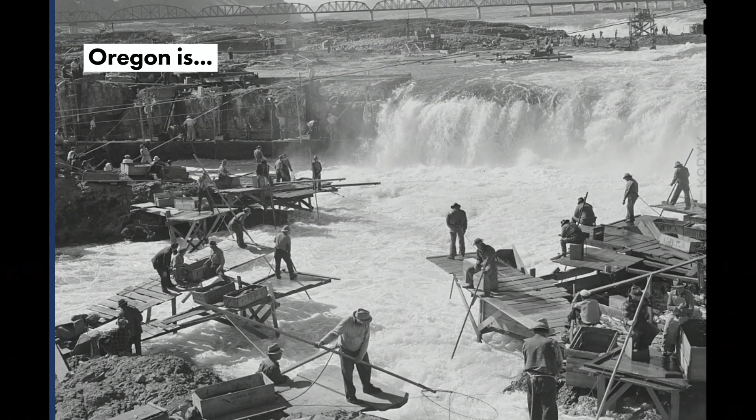It also has a long history of being rooted along its river. The Columbia River drains half the United States, it seems like. It's the second largest river in the United States, and has always had a relationship to that river. This is Celilo Falls, near Mount Hood, where for thousands of years the native populations would fish, and in the '50s they dammed it and they lost this.

But this image and this iconography is still very important to people in Oregon, but especially to emphasize that it's also this: Intel is the largest employer in Portland. They have huge multi-billion dollar fab shops there, just outside of Portland. So it's high tech plus rural economies plus extraction economies, both things simultaneously—we rely on each other.

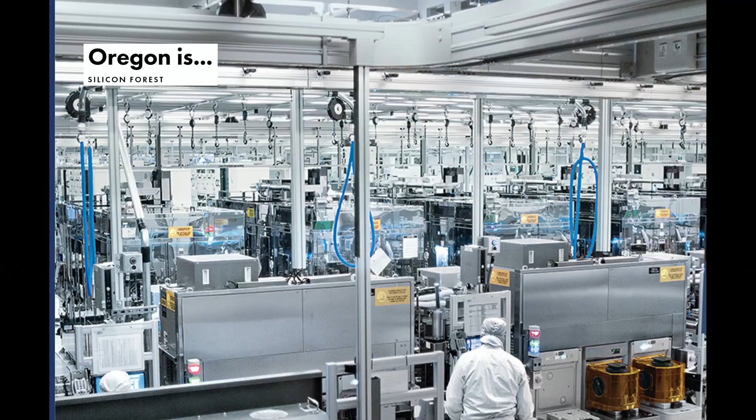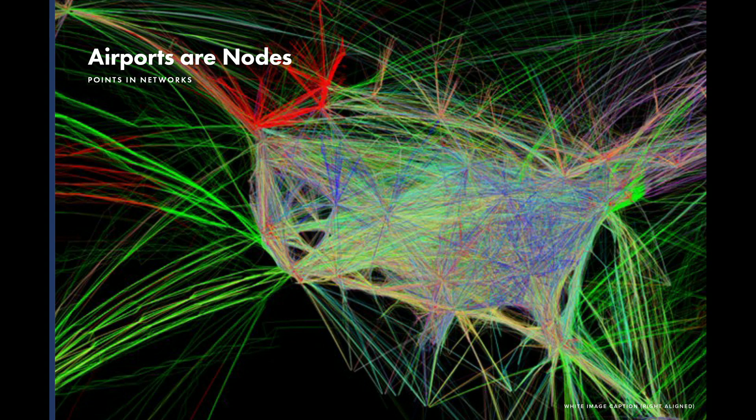Now, this project that I'm talking about today is airports. Airports are, first, nodes. There isn't a line from Portland to Indianapolis, but you get the point—airports are nodes. First, they are just nodes on networks. And as nodes on networks, they could be extremely anonymous. They could be just a connection, and that's all they need to do sometimes.

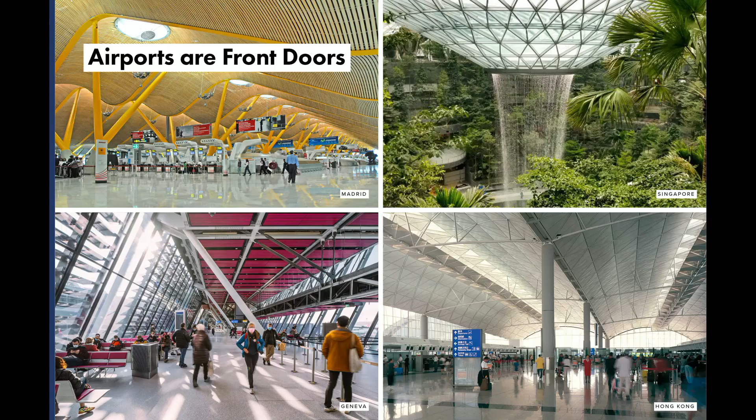They're sometimes front doors. Here you see some of the most iconic front doors in the world. You see Madrid on the top left, Singapore on the top right, Geneva, which I visited last year—astonishing, like space—on the bottom left, and Hong Kong, which kind of set a new standard for what an airport could be, on the bottom right.

All very different, all a little bit more specific to the places they are. That's something we were very interested in—there's some rules when you're doing an airport, things you need to do, but there's also a lot of freedom. So it's the freedom to express the place that we drove at with this project.

Like how do you get at defining a front door? And in defining that front door, how can you bring industries into a mega project? Because like building a cathedral, a mega project brings opportunities to do something radical—to lift up, in a cathedral's case, 15% of the economy of an entire region, which brings with it workers.

Expertise to accomplish that mega project. We also had the opportunity to do something radical when we did the airport, to think differently about how you do the job of architecture, how you do construction differently.

First, I want to talk quickly about ZGF. ZGF is based out of Portland, started in Portland—that's kind of the origin story. We started working in the region, doing primarily institutional work: hospitals, city halls, the public side of the city. Eventually we got into transportation, light rail, developing the light rail lines in Portland, then expanded along the West Coast, first to LA, then Seattle, then more recently Vancouver, and then opened up shop in DC. In DC we've been very involved in embassy work and larger projects—Amazon, for example, Amazon's headquarters two was done by ZGF—and especially research projects.

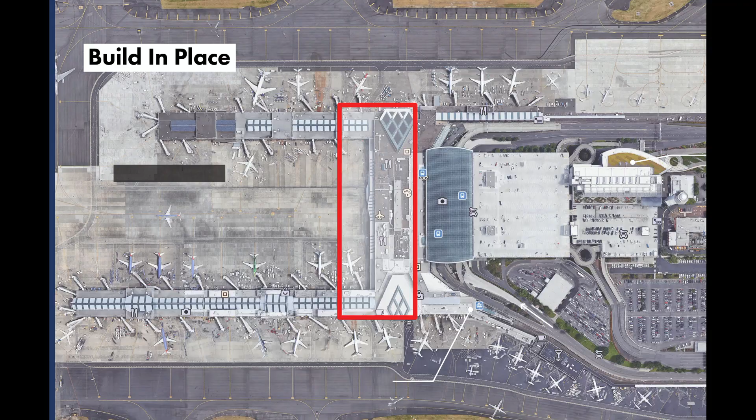Just to get some background, this is what the project is. It's an airport, and we've got to replace the thing in red there, the terminal, like the heart. We're working on the heart, we're doing open heart surgery. An airport can't shut down, so you've got to stay open.

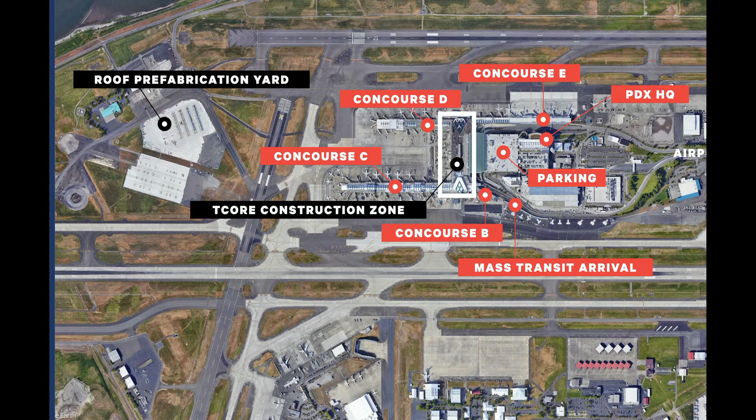More context: an airport involves concourses, it involves a terminal, it involves a central utility plant, but also it's got space around it. We'll get to that thing on the left later, but space around it became important in this project. So the ask of us was, hey, like many large pieces of infrastructure in this country, we've got a problem.

We're running out of space, we've got nowhere to grow. We've heard about this big earthquake that's coming. We're burning all kinds of fossil fuel. But we've got to basically double our passenger capacity, get to 35 million by 2045. We've got to do all that, grow in place. We've got to set up a new structural system which allows us more flexibility, because with technologies coming in, especially biometrics, it changes how people move through airports. Queuing is changing, the space needs are changing. We've got to do all that, but still save what's good about Portland, save our heart, what is giving us our identity. And by the way, we want you to double the operational footprint of this thing in capacity, but can you also cut the energy use in half? Figure out a way to do that.

And also come in on budget, but include as much of the local industry as you can in this thing. We want you to maximize, let's say hundreds of contracts to local people, not just a few, but really push this. And then no planes can be turned away while you do it, everybody's got to make their flight.

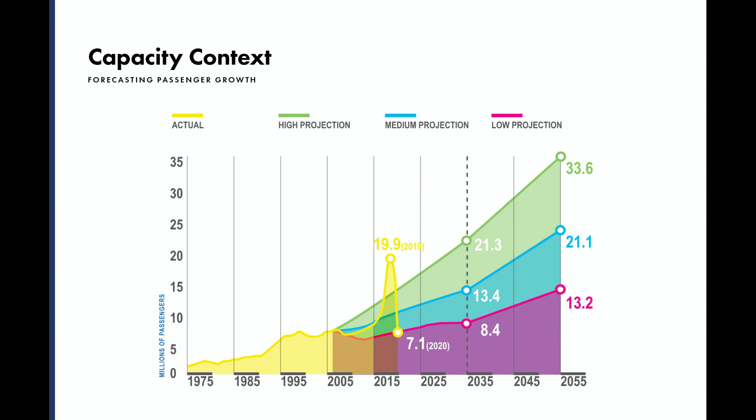And that means that, like most of the Pacific Rim, we've got volcanoes and earthquakes in Oregon. We just haven't been hit real hard recently.

But there was this article that made the front page, a huge article in the New Yorker about five years ago, by a geologist at Oregon State University who said he was doing tree cores in the Puget Sound, and finding that there was this regular period of earthquakes going back 10,000 years, evidenced in trees that got submerged.

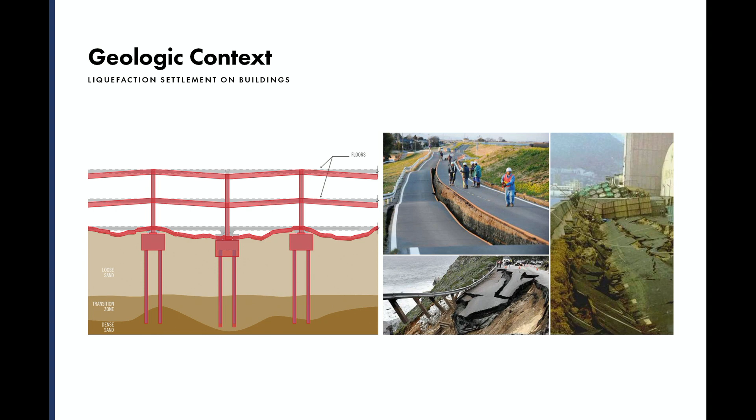And this is what it means: when there's a major earthquake, especially building along the Columbia River, you will get liquefaction. Liquefaction means your foundations will tend to settle, and when they settle, you get catastrophic collapse. The way you design for this is with piles, the vertical elements underneath the foundations, driven very deep. Our project addressed this by setting up a foundation that could withstand liquefaction, driving those piles deep enough to get below the soils that would move.

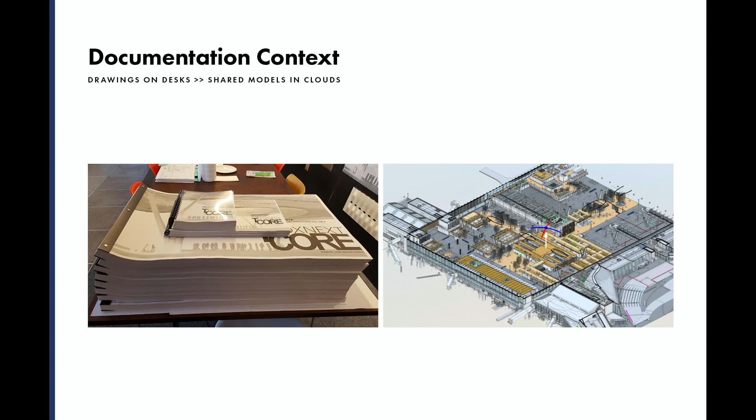The other context I want to bring up is documentation. The thing on the left is a contract document—a set of drawings, a 3,000 sheet set, the largest ever done in Oregon. The thing on the right is a model, which I saw on the screens as I walked around. The interesting thing is we now operate in the world of the model, and the model means collaboration. There are 250 models that are federated together, meaning you're working with the people building the buildings simultaneously as you design, so everyone's included, designing things virtually together. That has radically changed how we collaborate as teams.

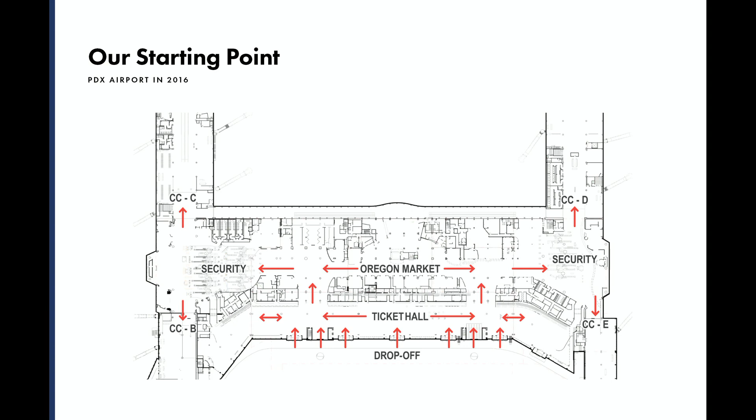So here, I want to get into the plan a bit. At the airport, you get dropped off—this is the existing building before we got into it. There's a ticket hall, common retail space, then you split north-south through security, and you're off to your airplanes.

That was built on top of many buildings that grew over time, like many pieces of infrastructure—12 buildings ultimately, stitched together, each with their own structural problems, their own collapse problems, their own architectures and identities. Our mission was to create something new out of that.

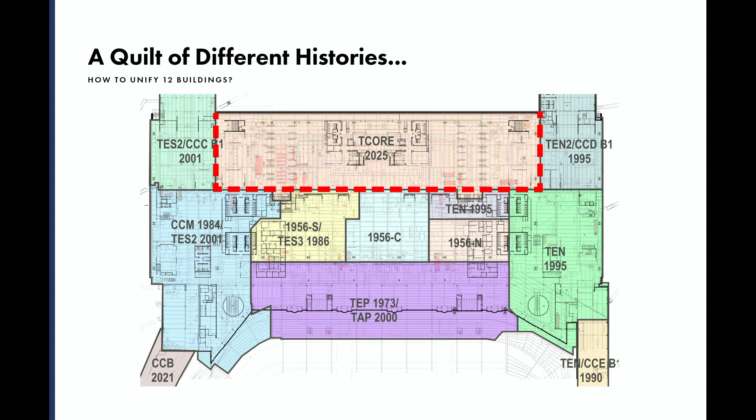Those structures are represented here, and the blue is actually the baggage handling system. When you go to the airport, the baggage handling system is below you—you often don't see it, but it's doing a lot of the work, kind of the nerves of the building. When you build over this thing, you can't really touch much of it. You have to come in lightly and surgically work your way through all this stuff.

So what we started to think, stepping back with our new plan, is how do you operate on a new scale when you've taken 12 buildings and created one space? What do you start with? We started with an idea about thresholds—because at an airport, you get your ticket, go to security, concessions, and then to the concourse.

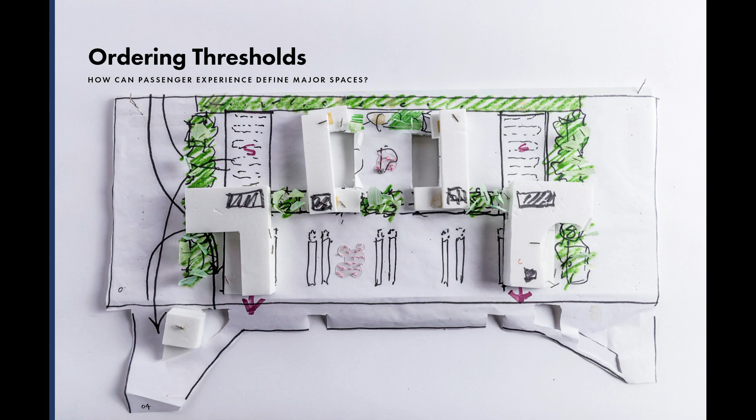Thresholds of space, thresholds of stress, thresholds of different kinds of processing—using landscape and materials as a way to make something of those thresholds, so there's a more intuitive way to move through the space, not just relying on signage. This drawing has no structure, no roof, no floor, but shows how we create moments in the plan which help define the important big spaces in the project.

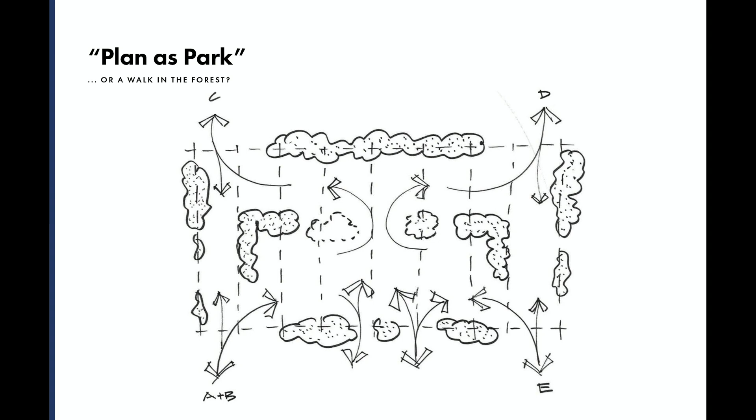And we wound up with this: you come in, there's ticketing, but it's flipped around. Then you get this moment of wood floor and landscape, then a market where people can get together, then security north, security south, and then you pop out and get your shoes back on under trees.

You've got some concession spaces, then you're off to your Alaska Airlines flight, Delta flight, or United flight on this side. It's set up using materials and landscape especially, and crafted elements to create big spaces. So it's like setting up a very big volume with small interventions of buildings, landscape, and materials to help people understand where to go.

Because oftentimes airports can be confusing, right? So we wanted to make it real straightforward—ideally you don't need signage.

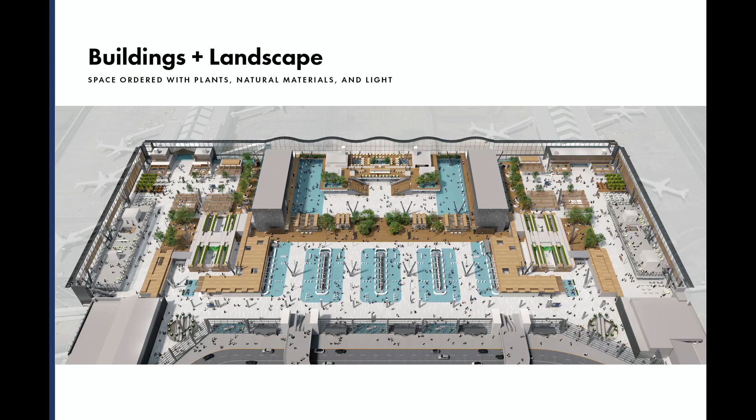And these are those big rooms—it's like a big volume. This is a 9-acre space, 1,000 feet by 400 feet or so, organizing principally around these spaces: a ticket hall, a market, and a security area where the queue can flex, growing into this space or stretching out of it depending on the holiday season, say.

Then you leave into the concessions area, and if you arrive into Portland, you come down these concourses and pop out into this kind of landscape element, then down to get your bags and leave. So the idea is it's hopefully super straightforward, and it just makes sense when you're there, without needing a lot of articulation at the scale of graphics or signage.

And then this is the kind of setup here, which starts to introduce the idea of this roof and its sizing. Now, as I mentioned, we could only come down a few spots—what does it mean to do that? Well, it means you've got to come up with the right spans for structure to thread through that existing building.

In our case, we traveled around the world and looked at what it takes to set up a ticket hall—it takes about 100 feet. Imagine your ticket agents: you're checking in your bag, you're waiting, you have a queuing area, and then you have circulation areas between this, which gets you moving through the ticket hall.

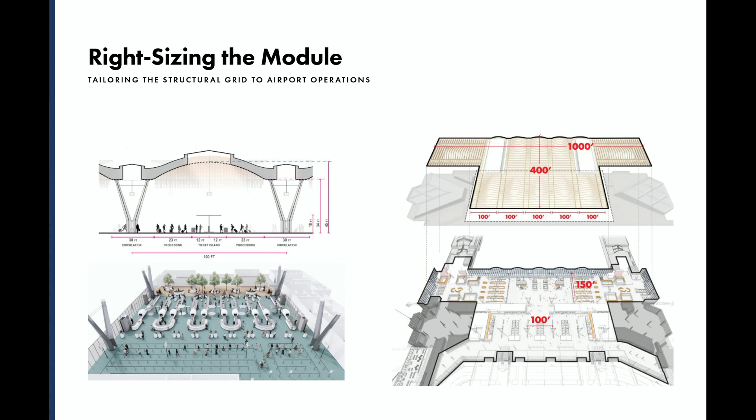The other scale is 150 feet, which allows us to stack security lanes with no columns, so the TSA—because they're always changing how they set up these things—has flexibility to grow as they change technologies. This space is meant to be totally flexible, so they can introduce biometric technologies to help you pass through quicker.

And that sets up an idea of a grid to overlay over this new building. But first I want to talk quickly about the structure—that was the structural interventions—and then there's the systems. How do you also get at the carbon question here, growing but also reducing the energy footprint of this building? Here's the summary slide of that: we focused on the primary systems of the building, which is the central utility plant.

We focused on creating a high performance envelope to take down the cooling loads of the project. We focused on the roof—it's a big roof—so how do we maximize daylight underneath this big thing? And how do we basically allow you to operate this little airport without turning lights on if you really needed to?

So we came up with the idea of a series of different kinds of skylights. And then materials, bringing in those local materials, bringing in the low VOC materials, bringing in a lot of things that people would actually want to be around as they're occupying the space.

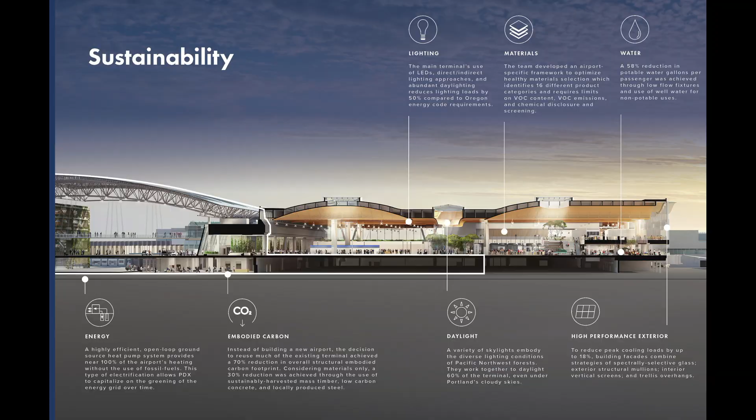What we did is basically kept this building from the late 50s, this old central utility plant, stripped out the boilers and replaced them with heat exchange units. An airport's got a lot of land, there's places to drill geothermal wells, so we had injection wells as an open loop system, injection wells and extraction wells, which we connected to that central utility plant, and then used that steam piping that had been steam, converted it to low temperature water, right? Just used the same system that was already there, just by converting to heat exchangers in their existing central utility plant.

Well, you'll ask, what happens when you build this thing? We're doing it in a very schedule-specific way, right? We're headed towards summer right now, so cooling is still important. But we're setting it up so that the switchover in terms of the systems is very quick, and we can do it. It's this really smart little game that our mechanical engineer came up with - to use what they have and backfeed the existing distribution systems, which takes us to this, which is our EUI.

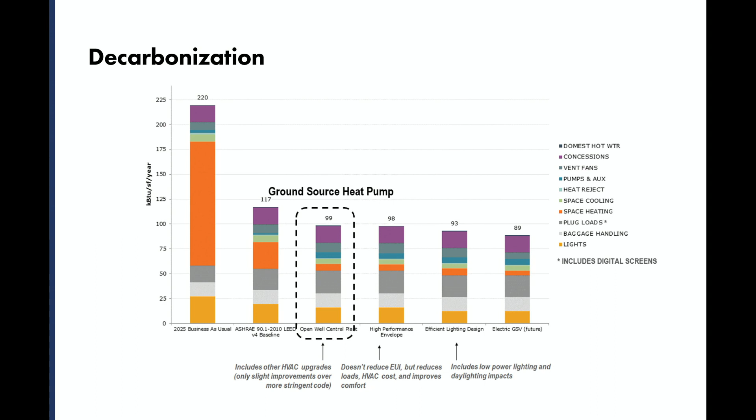This is an energy use intensity, which is like BTU per square foot. It's a metric for how energy intensive your building is, right? And we were able to, with geothermal, drive under 100, and then work our way from 100 down to 89-ish as we electrify more things, with a high performance envelope, with a very efficient lighting strategy - just pick at it until it gets to 89, which is really good for an airport.

And then there's the embodied carbon side of this thing, which I'll get to a little more later, which is basically saying, well, concrete is obviously intensive. We need these foundations, but the piles are steel, and the steel - we can try to find recycled steel pipe to build a lot of those. The steel structure itself is also fairly intensive, but we can find local fabricators to reduce that footprint, which we did.

And then the wood is very helpful - there's a lot of wood in Oregon. But what if there was a way to really maximize the benefits of wood by being very specific about where it comes from? Because if we can bring the wood in from forests that are managed very responsibly, we actually get more benefit. So that's a little bit of what I'll get into here.

But first - construction management folks, shout out, come on! I want to share a little about how we built this thing, because to have a conversation about how you build it and what you build, for this project, that's the same conversation. You can't build this thing, you can't even imagine this thing without first and simultaneously thinking about how you build it.

Our mandate was to keep the building going. The planes had to keep going, right? The passengers, up to 20 million a year, had to make it to their flights, which means we had to build this thing in such a way that it couldn't get shut down, ever, right?

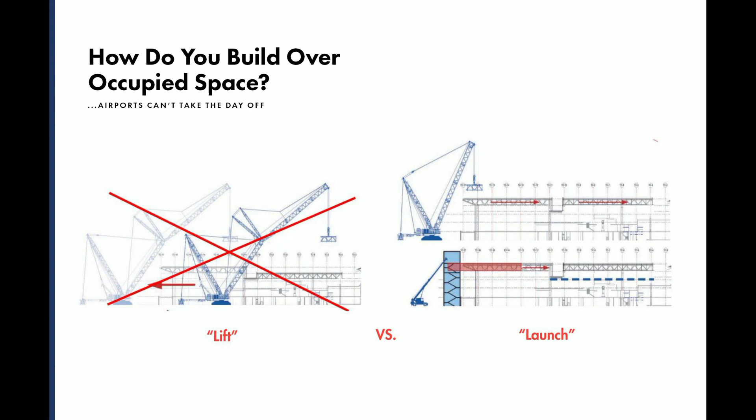There is no day off for an airport, right? And that meant we couldn't use big cranes to lift things into place, because that would mean you'd have to shut down these spaces down here, which have to stay open. So the Port of Portland required that if we were gonna build in place, we had to come up with a way to slide things over so that this stuff below can stay operational. And that changes how you think about it. It means that if you're sliding it into place, you're building it somewhere else and moving it over to the construction site and sliding it in place.

One of the illustrations we did early on was this. It was like, okay, what we need to think about is building a new column idea, where all the tops of these columns are at the same height, and this roof thing slides almost like rail cars into place. Which is what this illustrates, the idea of sliding things into place.

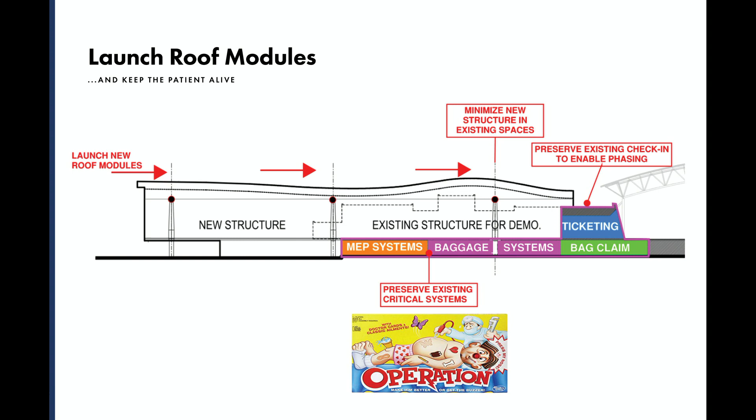So the next set of columns is there, outboard, and then way outboard. You have to keep things going as you slide the new over, and you can demo the non-essential - the retail spaces, offices - and that existing floor gets upgraded in construction.

So here's the diagram of what that is. You get these columns at the same elevation, and the new roof shares that same level so you can slide it into place over those columns, and these things are what we call modules, roof modules. And these are big - this dimension in this model, these are 150 feet apart, so the total length is close to 360, with big cantilevers on the end - this is actually a 65-foot cantilever. So these are big super modules, and then these modules can be very specific to the spaces below them. So that's what we do - come up with a very regular frame, but within the frame, very specific roof shapes and interventions that help frame the spaces below.

Very simple phasing, right, which the contractor loved. We initially had like 23, 24 phases to the project, and we reduced it basically to 2, because of this idea of the module, which is repeated - this is a repeated version of that, and that. And these things all get built off-site and then stitched together in a very specific way, which this diagram shows as a model of the modules coming together. We slide them into place over the existing building, from the airfield on this side.

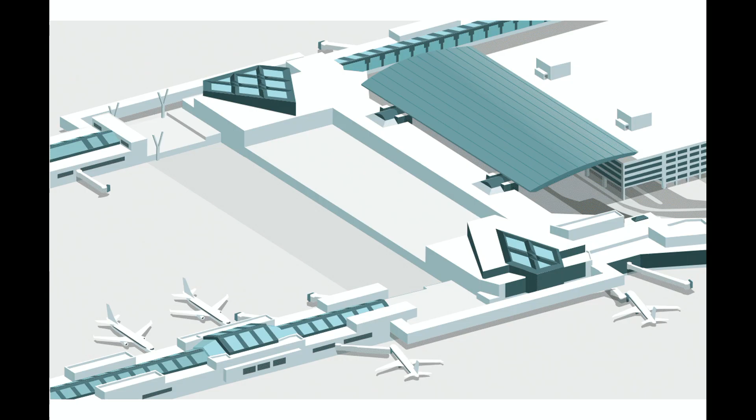And then this illustrates that kind of quick process here. So you get the columns getting dropped in, the roofs coming into place, first over the existing, and then off the two ends of the concourses, and this kind of mega machine moving them into place, which I'll share with you.

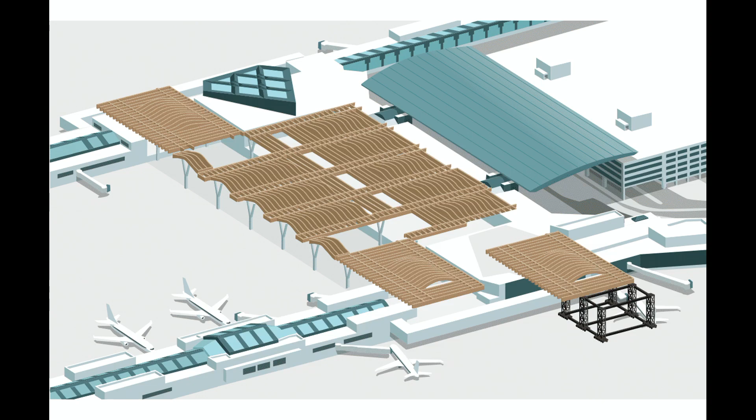Pretty unique. These are like 1.3 million pound mega modules that are built off-site and then slid into place to make this new building. And that off-site happened to be right down the airfield from the existing building. There's the main terminal there. This is where they got built, called Fab Yard, 1.2 million square foot Fab Yard, just to the west of the main tarmac and alleyway for the airport.

And this got built right away. So the first thing we did is build this. And the reason we did that is schedule compression. Because normally, you demo something, you get ready to build the new thing, you start building the new thing, you work your way from the bottom up. Here we went top down.

No, let's start with a roof. Let's get that going right now, because we can get it, we know what it is. Let's get it going right now. And that allowed the demo to happen at the same time, and that allowed people to move out of their offices and get ready for the new stuff at the same time. So it allowed normally the things that get stacked up to the beginning of the project to all happen at the same time, which reduced the amount of construction time tremendously and also helped with that whole budget pie chart thing.

And this is what a fab yard looks like. So the cool thing here is that when this is in place, this thing will be 60 to 75 feet in the air, and you imagine how hard that would be to work on. Well, in a fab yard, if it's prefab, it's 12 feet in the air, which is a pretty typical ceiling height. So you can get armies of people on these scissor lifts doing their work in a safe way, and they can talk to each other.

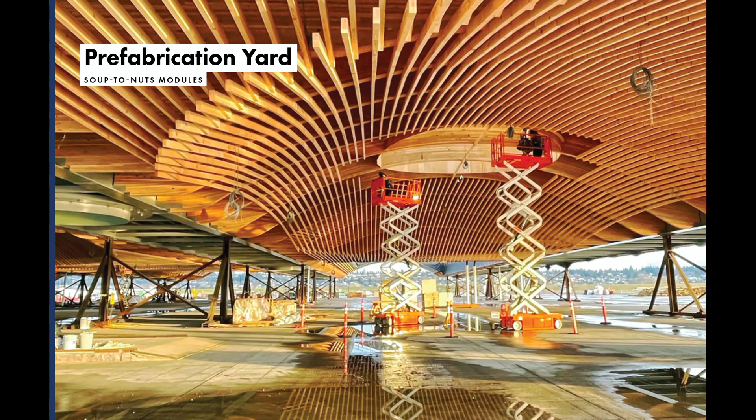Let's do this. And so here's an image of the fab yard a couple years ago, and here's from the inside looking up at that new roof getting built. And it was built in its entirety. So the roofing's on this thing, the structure's there, the acoustic baffles are in it, the fire protection system's in it, the lighting is in it.

So that when it's pulled out of that fab yard, we call it unzipping. When you unzip this thing, you have to build it all together, and then you have to design zippers to make sure you can pull it apart, because it's got to move its way over to the airport. It all goes together, and you don't want to go back up on that roof and reinstall something. You have to just get as much done as you can here, so that when you move it over to the airport, it's as done as possible.

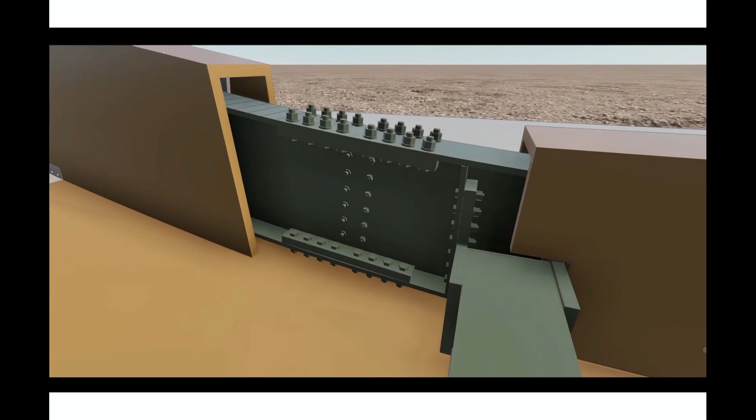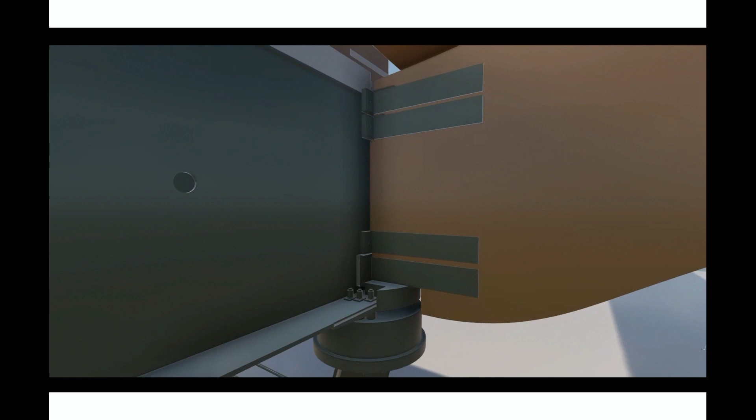And here's kind of an image of just a study that we did with a company in Canada designing the assembly process. Again, back to that construction thing, working on how do you design a zipper so you can unbolt the steel parts of the roof and slide things out and rebolt them together. So that's what this is, and you see some of those columns here. You see this is just one of the modules of the roof sliding out of place. But we did this to illustrate sequence, to illustrate to our contracting partners and the owner, the Port of Portland, how this could happen in a safe way, and how we can manage the risks associated with moving big things around.

And this is one of these modules, right? So it's a kit of parts, primarily girders, which are the kind of straight lines on the edges here. These are steel, basically bridges, built the same way as a bridge girder, steel bridge girder. Very simple and almost a commodity in terms of price.

Simple. And then it's wood. All the stuff going in this direction is wood, big wood beams that are all made in Oregon and have different geometries. We only have like 7 different arches, but we create loads of different shapes with just those 7 arches.

And then skylights, which are subtractions. So over the columns, there's a kind of round structural beam that actually became a skylight. Over the landscape elements, you get these big skylights. Over important moments in the plan, you get these smaller domes, almost like the Pantheon, say. And those all mark space.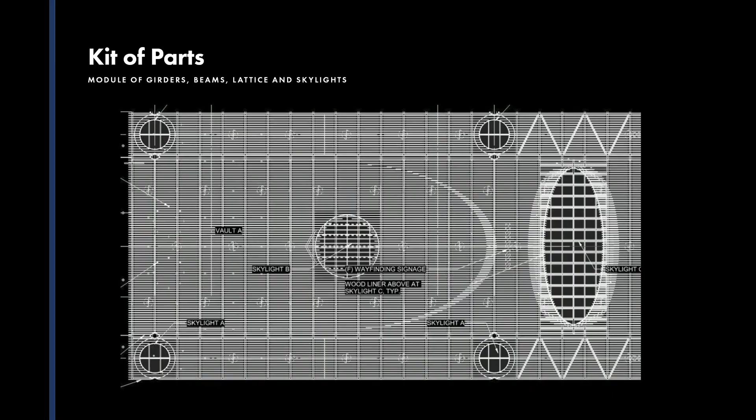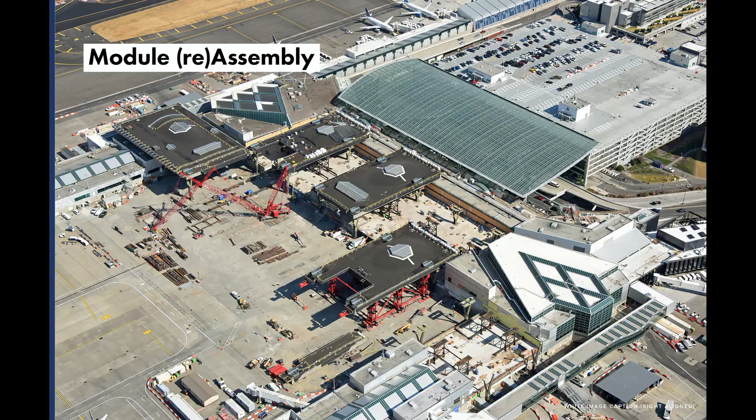So crews working on the module, getting the lattice installed out in the fab yard. There's the fab yard, and the roof is in its complete form. Here it's getting unzipped. A company from the Netherlands came over, and Houston came up and brought their equipment from Houston ultimately, but it's Mammoet. And they were the team that figured out how to move it, right?

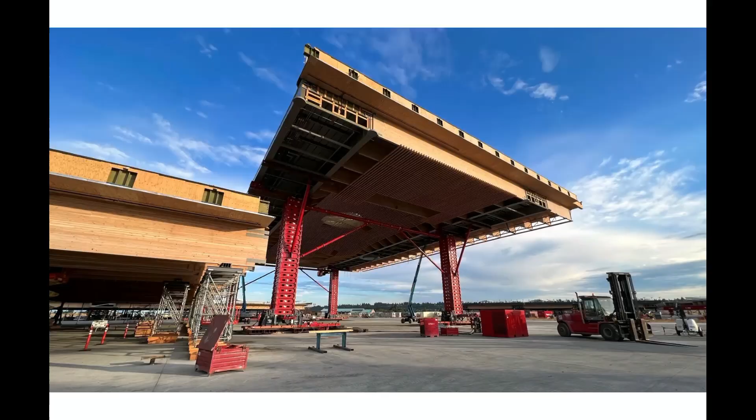And so they come up with these big steel elements that are basically jacks and robotic feet that move this thing to land on those columns. And so here you see it moving across the airfield at night. We got a 3-hour window between the last flight and the first flight. So think 12:30 a.m. to 3:30 a.m. kind of time frame to move this thing over.

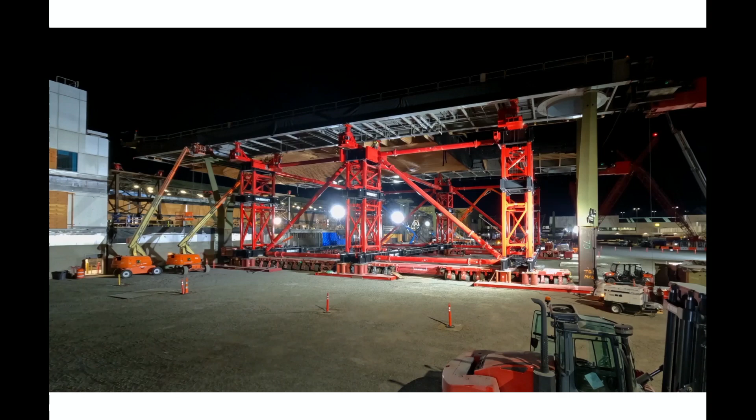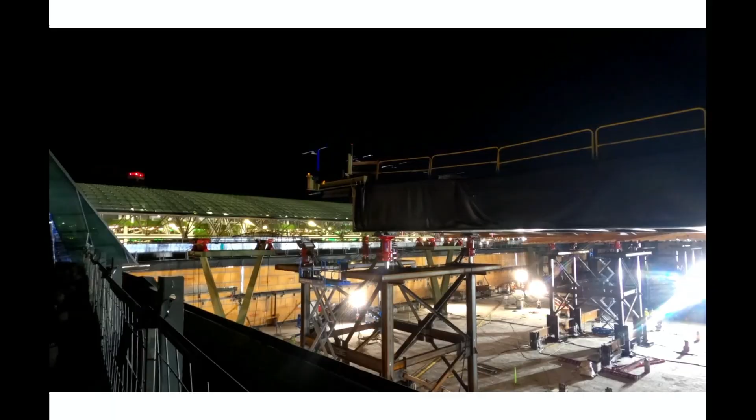And then when it lands, it lands on a column, and it'll get slid into place with what are called strand jacks that pull the roof across the columns, and allow it to very delicately work its way there - there's, as you might expect, a lot of grease involved here, lithium grease, to get it in place. But it allowed us to keep all of those baggage handling systems, all of the people getting passengers to and from their flights underneath this construction, keep them working, right? So that work can keep going while the roof is being slid into place over them.

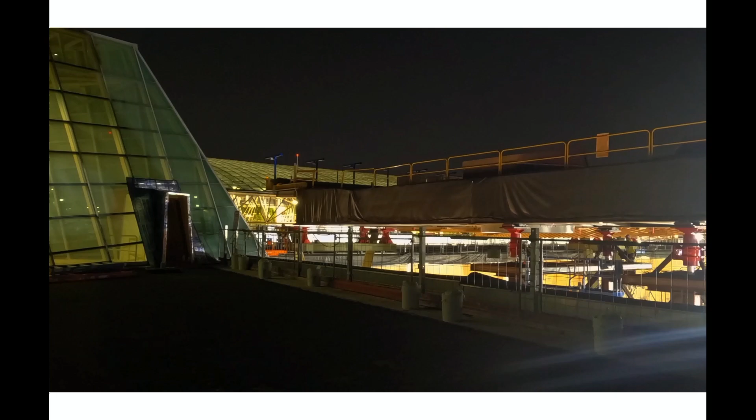And again, these are very big elements. I think the biggest one's about 200 feet by 100 feet, and 1.3 million pounds is the biggest one. But then they get kind of stitched together, where there's the primary girder, and then there's infill elements that slide between the two steel elements.

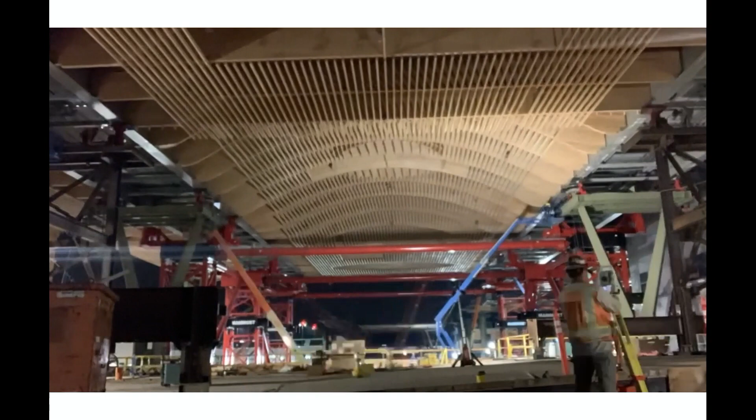So a really challenging construction problem that a very big team of very smart people - engineering, contractors, the owner, architects - everybody's working on this. How do you think through how to build something over an operating building that completely turns upside down how we think about our sequence through here, right?

And we explored, like you guys do here, a lot of models initially were spanning between columns, again long span structure, in a roof that allowed light in. That was a key thing for us. How do we set up a roof that allows light to get in?

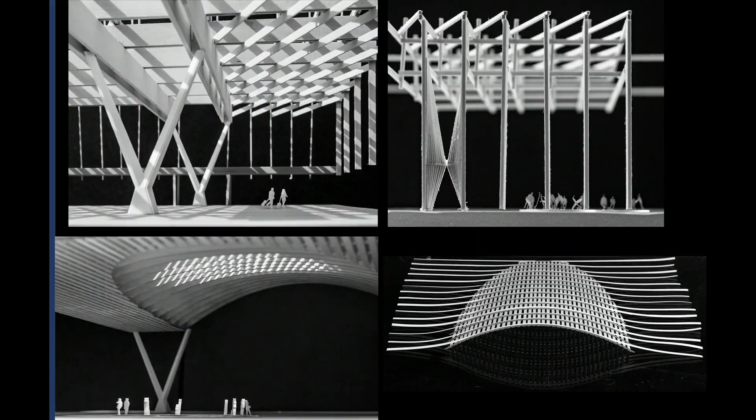These are early sketches the team did on the columns, which split the load of the beam in half right away, and give you a zone where steel runs all of your rainwater, sprinkler mains, and all of the mechanics of the roof.

Then you shape the vaults in between, and those vaults can have specific shapes tailored to the spaces beneath them. Under the ticket hall, they're domes. At the perimeter, they're vaults letting light in. And then other lights, skylights, between them.

So here's that kind of geometry—columns 100 feet apart, big glulam beams with lattice underneath, steel girders between the columns. This is a 100-foot span, and underneath, 38 feet in the air, you get other structures which are concession structures.

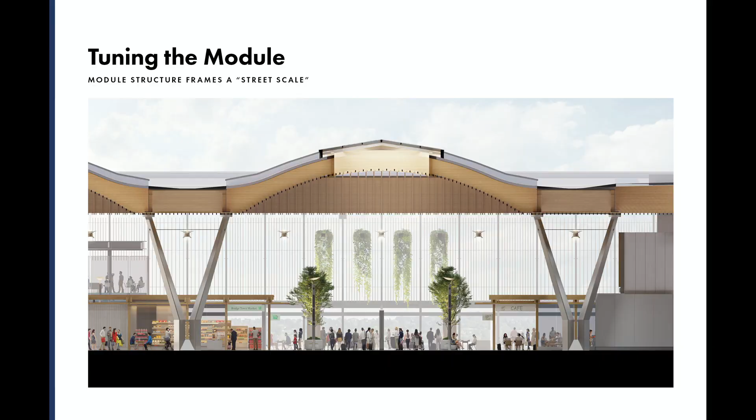Trees, light posts—so this starts to feel a lot like a street, and in fact it is, exactly dimensioned off of a very important Portland street, 23rd Avenue, our main retail street. The dimension between here and here matches exactly the dimensions on 23rd Avenue. So you get your coffee shop, your sidewalk dimension, and then your thoroughfare dimension. It's set up to be familiar to the streets of Portland in a very specific way.

The team was exploring what it means to get at that roof and get light in—models, we lived in models for years on this project. We had teams building fabulous models of this roof to explore specifically how light and how construction could be thought through.

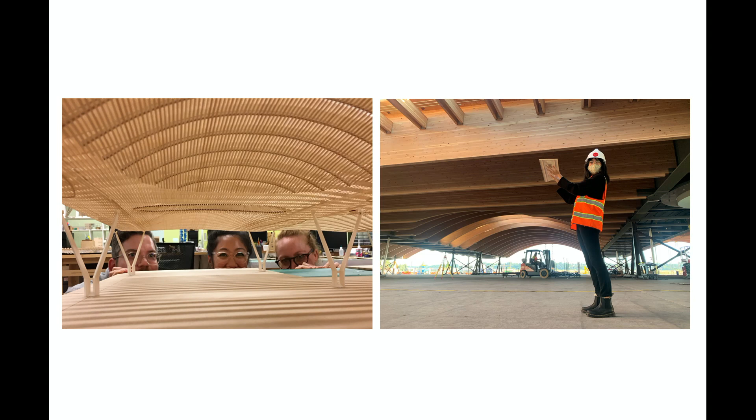Here's Talisa from our model shop going to the fab yard with the first model she made of one of these modules, kind of proof of concept—a really proud moment of contributing this thing to the thinking of how this could come together, even at that scale.

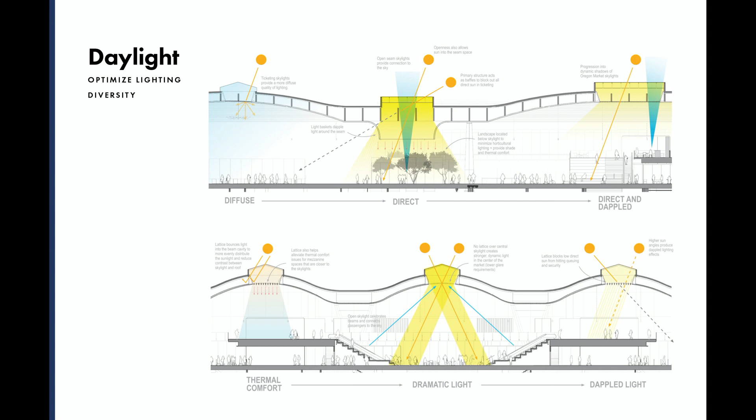And it's not just any light, it's all kinds of light—it has to have a variety of experience. Some of it's direct for landscaping elements, some of it's dappled light for different parts of the program, seating areas, restaurant space. Maybe dramatic light to punctuate different parts of the plan, direct sunlight on the floor. But mixing it up—sometimes it's controlled, sometimes it's not—done in a very distributed and careful way.

Skylights are expensive to maintain. You don't want too many, but they do a lot of work for you. So the question was, how much can we just rely on daylight for this whole airport?

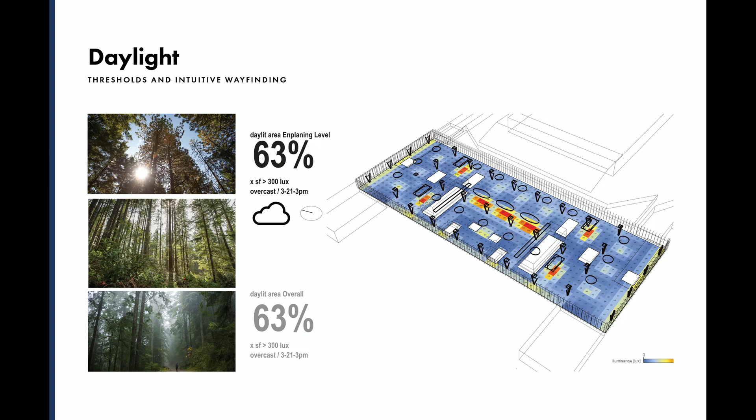We wound up with over 60% of the floor plate above 300 lux, which is fine to work and walk around in. So most of it is daylit, and some of that daylight is punctuated, shown in dark red. In fact, now the construction team, when you go there, isn't relying on lights—the roof's on, but they're just using the skylights to build the building.

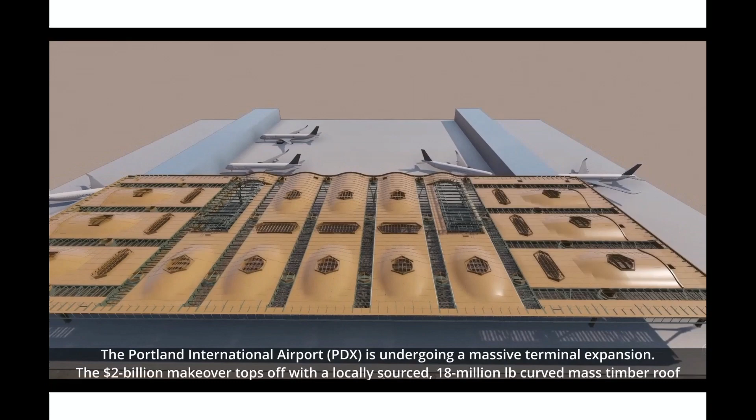This is a quick summary image—I'll skip over it since we've seen some of this—showing all those different skylight elements on the vaults, giving a sense of where they are. All the skylight elements were built out of mass plywood, like these little hexagon-shaped things, and then we put a fairly conventional skylight system over that.

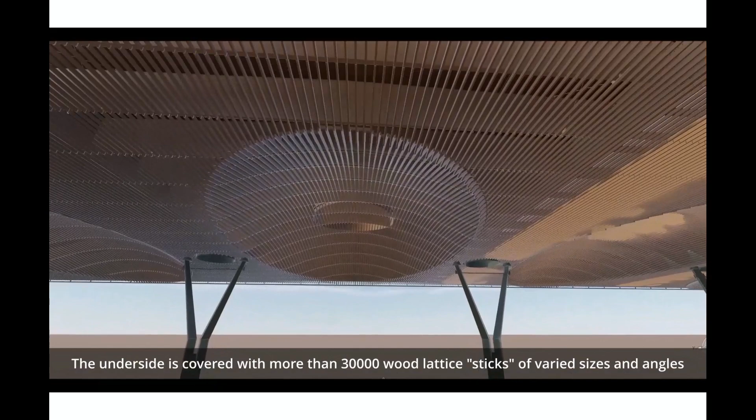These models are done not for the client, but actually to help the contracting team, the people building the building, understand how to build it. They can have conversations about sequence and getting people in and out of spaces.

These are those light baskets from below. Just last week part of my team was here visiting. You see these are 60 foot by like 20 foot skylight elements that bring light into the space.

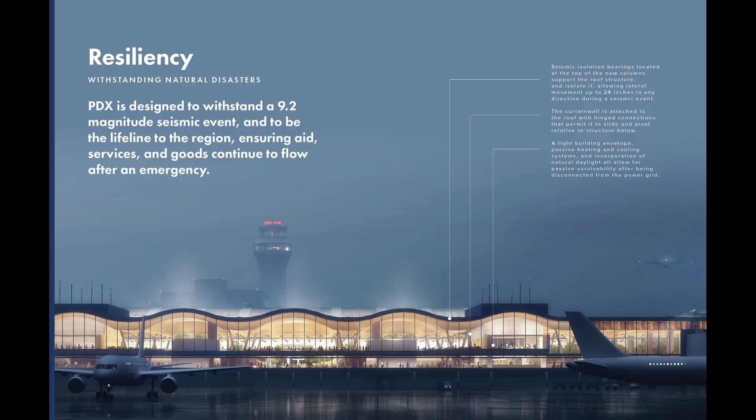And then the curtain wall. The curtain wall is part of this resilient system. A curtain wall hangs, right? Think of a curtain, curtains hang. The curtain wall hangs from the roof, not unlike a tablecloth.

So this was the concept for the curtain wall of the building. It's a big box, 1,000 by 400, but also includes many very specific edges. The key thing to appreciate is that big curtain wall has to move with a roof that's moving 44 inches, as Pam said - so 22 inches in every direction. That's a lot of movement. Nobody's ever done something like that in North America.

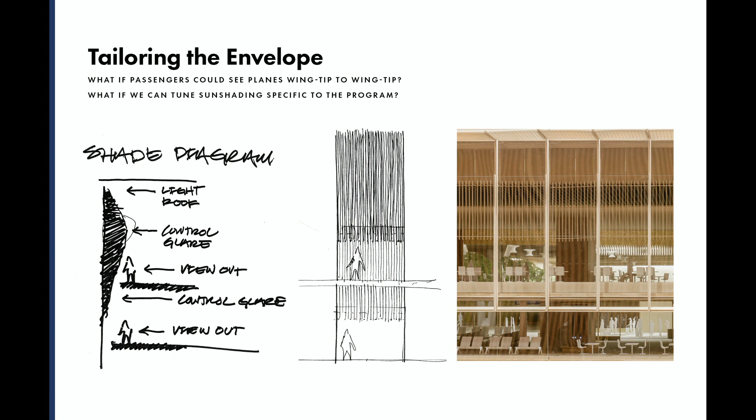And the curtain wall has to do things very specific for the occupants behind it. Some people like colder environments, some people like warmer environments. There's a diversity of experience that's important to support all along the perimeter. That diversity of experience was a layer we add to the curtain wall - kind of sun shading and glare control that hangs with the curtain wall.

We did a tremendous amount of analysis - if we're going to control glare and sunlight, where do we do it, and how much of it do we do it? We studied both visual comfort, how much sun is hitting the floor at specific areas around the perimeter, and also first cost, like how much we can reduce the cost of cooling for this project, since we're adding cost to the curtain wall.

We did it for every elevation, for the horizontal elements, below the vertical elements. In some areas you get fairly significant first cost reductions, 18% to the cooling load for this whole elevation, which has real dollar consequence. Some are less significant, but you balance them all.

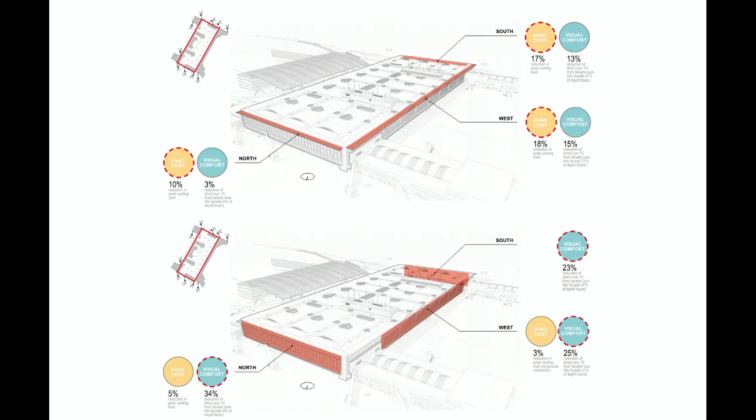To wind up with something like this, kind of a Swiss Army knife - we call it high performance, low profile. At the passenger level, down here low, it almost goes away. There's no mullions, it's just butt glass, jumbo glass, 10 foot by 14 foot tall, with no mullions. The goal was just to kind of deliver some magic.

So like you're a young kid, you go to the airport, you want to see airplanes. Airplanes are big things, hundreds of feet wide, and they're right in front of your face. So you want to see wingtip to wingtip - that experience of seeing the entire airplane as you approach the perimeter of the building.

As you move up and you see the clouds, and you need to control sun, the density of stuff increases, and so we get this kind of grill work up above. This is a section on the right of a curtain wall, and a diagram of it at a chunk of the building.

And here's what it looks like from inside - it should just be gone. You shouldn't see anything there. You should just see airplanes, you should see the hills of Portland beyond. It's not about the glass - you want it to just be gone.

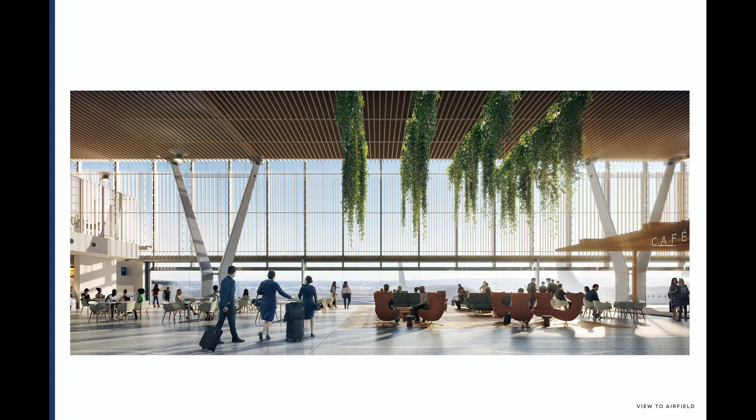But as you move up, it has work to do - it has to control some of that sun, so the stuff starts to show up. And from outside, this is just a view of how you relate to the volumes. But it hangs - this is hanging from the roof down.

This structure is 2 feet of your building. And when you're spending between $3,000 and $4,000 a square foot, that's lost revenue, right? That's not useful space. So our first thought was, well, can we flip this, get this outside the building so the owner can lease this space out and make revenue on what's on the inside.

You see it's very minimal, right? There's not much there holding that glass. There's structure outboard, and a little clip that the glass hangs onto, and then the sunshades on the inside, the glare control elements, are supported.

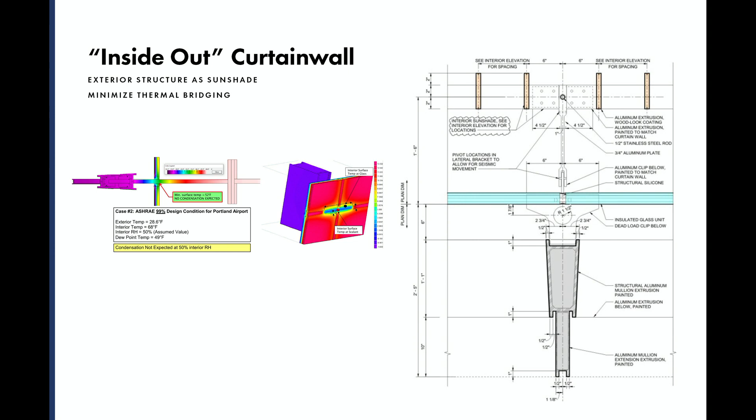We did a thermal analysis proving this was really giving us a lot. This is a very high-performing curtain wall from a thermal standpoint. Here's some detail - that stuff kind of aggregates to something like this.

We get 10-foot spacing, and we call this jumbo glass - they don't really sell this at your local hardware store. This is very special, very optically clear glass that allows good color rendition through it. It's very flat - it has to be, because it's also acoustic. It's laminated, there's airplanes out there. So it's doing a lot for us.

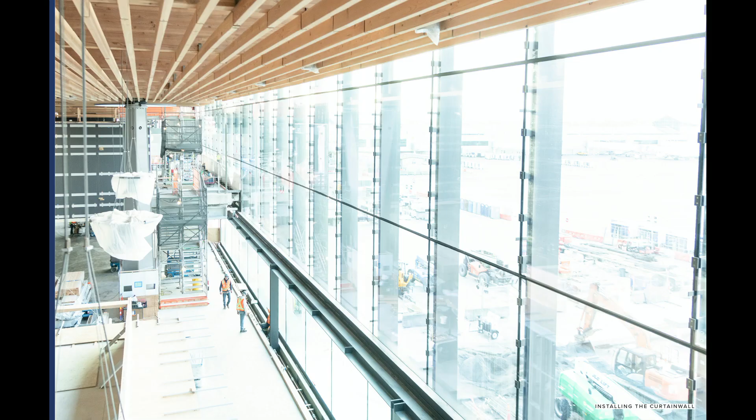But the goal was, in spite of all its technical criteria, to make it just kind of go away, because the real show is the landscape - it's the river out there, it's the planes. This is a washed out image, but it shows you how minimal it is from inside looking through it - there's not much there, which is the point.

Movement - that system moves a lot. The roof is going 22 inches each direction, so it's hanging up here and sliding down here, and it's got to slip. As the earthquake's happening, it's slipping left, right, pivoting from the roof, rotating. And when there's snow on that roof, it's also got to go up and down 4 to 6 inches.

So there's a lot of movement, and it's a very complicated detail. You draw details in architecture - some details are really, really important. This detail had a lot of people working on it for years. This is like a multi-million-dollar part of the project, to get this right, and the amount of things this needs to do to get this building to function was very critical.

It's hard to understand maybe, but it's diagrammed a little here on the left. This is a moment where that curtain wall hanging down connects to the roof, which connects to structure coming off the floor here. So it's got to slide in one direction, deal with snow loads of 4 to 6 inches vertically, and also allow rotation when that big earthquake comes, because this glass cannot fall off - that'll hurt people. It's got to stay in place. So that's what it means.

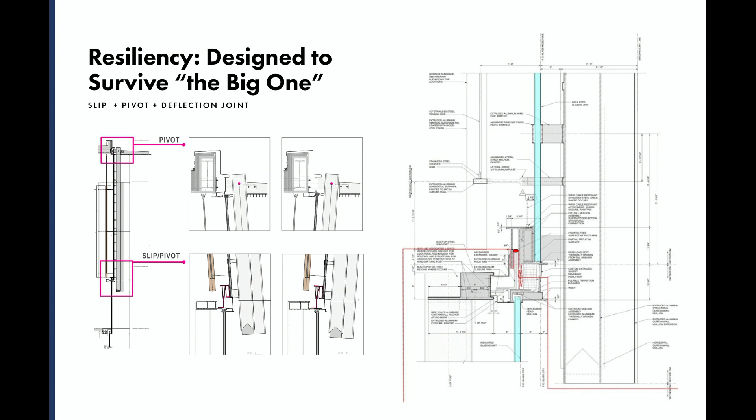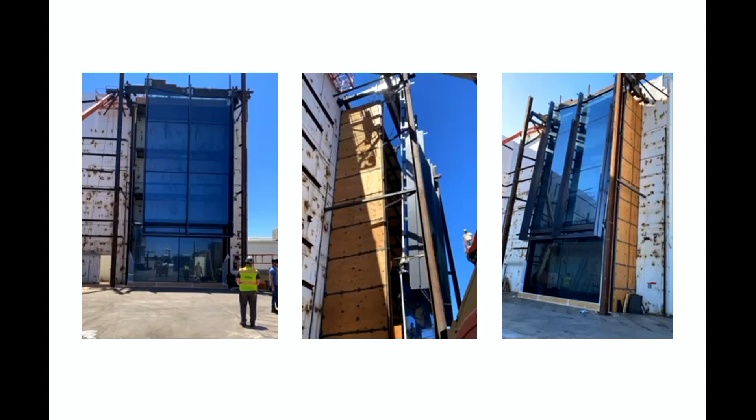Then we had to design these doors - oh, this is a nice little thing here. So that slip, pivot, deflection is illustrated by a video which isn't playing, so I'll keep going. Which we tested, right? We test these things. This one is sliding, this is rotating, and this is a deflecting video.

Here it is getting built recently. Here it is from the outside - again, jumbo glass, but it's headed towards completion. So lastly, I'm sorry I'm running late.

You actually have the relationship also with the people that grow the food. And that's kind of what we were driving at here, is how do you get away from the problem of architecture, from, you know, you don't just go into Google and type in 'give me a window.' It's like, how do you set up the many hundreds and hundreds of relationships to get something like this built, in a way that sustains them, in a way that creates a very real kind of identity for the project, which isn't just carpet. It's great carpet, it's endearingly garish, as they say. But that carpet right now is what their image is.

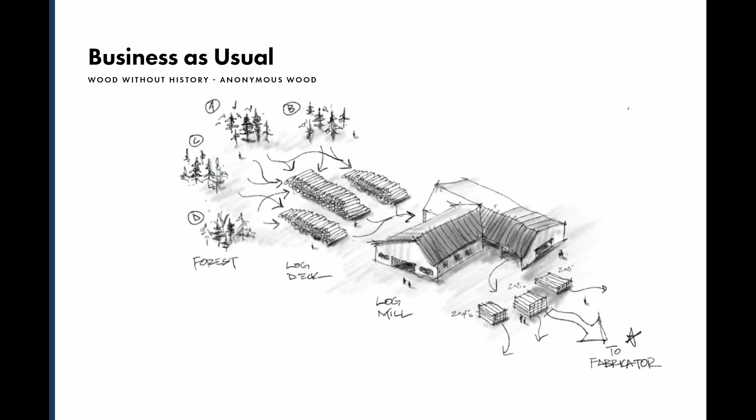Transparency, so creating transparency, just asking the question, well, where does this come from? How do I know where these logs come from? Is it from forest A, B, C, or D? I don't know, but asking the question, demanding an answer, starts you down a path which leads you to something like this: segregation. Well, okay, if it's important to you to know where it's from, the mill owner needs to set up contracts differently with the forest owners over here, so they can start to identify and segregate the wood in very specific ways. So that at the end of this, you can point to your building and say, oh, this family supplied this wood, or this tribe, in our case, supplied this wood.

And so at the end of the day, your whole building, in our case almost 1 million square feet of lumber, we can point to every stick and know its origin story. Whether it's tribal land, a small family farm, a nature conservancy, or estate lands, whatever it is, they all have a presence that's specific, and will actually wind up getting a tag on a wall saying this is where the wood comes from.

And here's some of those landowners on our project: the Skokomish tribe, Hyla Woods, a small landowner in the Willamette Valley, the Nature Conservancy. Family woodlots, which are very common in Oregon, it's not like a big farmer, it's a family farm, and each of these have different goals. The Nature Conservancy might have a wildfire resilience goal, the tribal lands might be looking to do more forest restoration.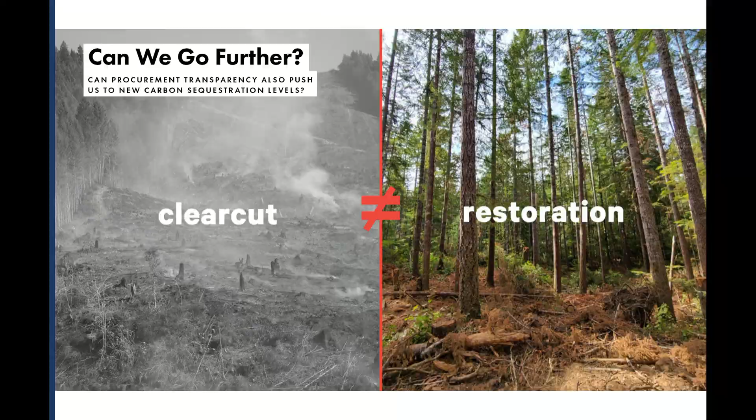So there's a lot of good reason to do it on the right, but for our project, it was part of the carbon story. We learned that if you can account for the wood that stays in the forest, the biogenic carbon, and measure it in a real specific way against the amount of output, the carbon sequestration story changes dramatically.

So yes, wood is more efficient than steel or other alternate building products, between 6 and 15% better in terms of its carbon story. But as soon as you start also accounting for the forest practices of where that wood comes from, that savings jumps from 18 to 40% depending on the forest management. In our case, we landed at about a 30% improvement over baseline by being specific about the kinds of forests the wood is coming from.

And that matters not just for the wood lot owners, but also the fabricators. So that glulam business—glulam is a beam, this is glued laminates of wood. This is Zippo Lumber in Eugene, Oregon, where I'm from.

They shut down their glulam mill in the 80s, like a lot of people did. But this project allowed them to restart. They invested in a new plant, hired more people, and that industry on the rural-urban fringe—the mills and fabricators—were able to jumpstart because of this project, and a new market was created for them that they were able to take advantage of.

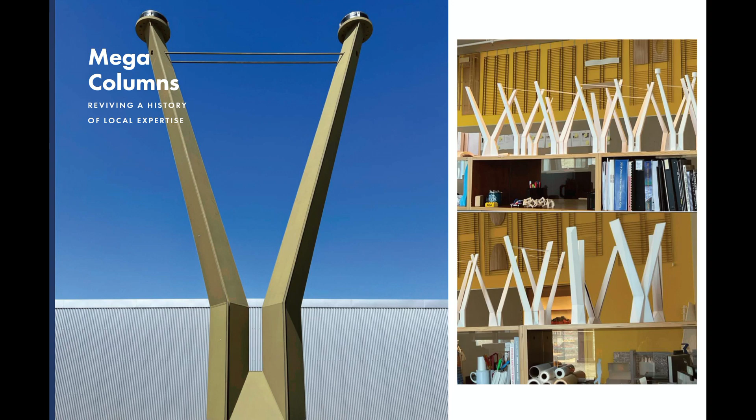And so finally, I'll try to wrap up with craft. Not unlike the wood story, other industries benefited from this project, including the steel industry. The columns here are really unique, and they're made right across the river from the airport here.

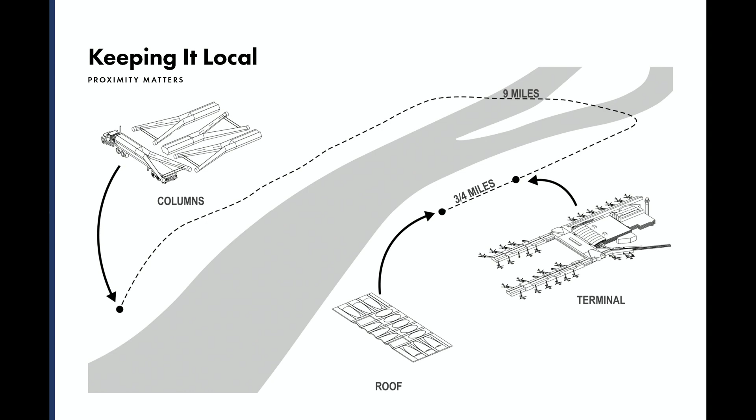It's kind of a 9-mile loop over here. I guess here they might call that a Michigan loop, I don't know where I heard this term, this kind of U-turn. So this is the U-turn from the airport across to the steel mill, and it's the same steel mill that built those Liberty ships. The Liberty ships were built right here, that's where the airport is. There isn't an airport in 1945 here, it was somewhere else.

But there's the airport now. So right across the river from where the columns are made, in the old Liberty ship mill, is where the roof is made. So there was this kind of fantastic charge to the steel fabrication yard because of our project, where they were able to scale back up their whole operation into a new level of engagement in the fabrication side of steel.

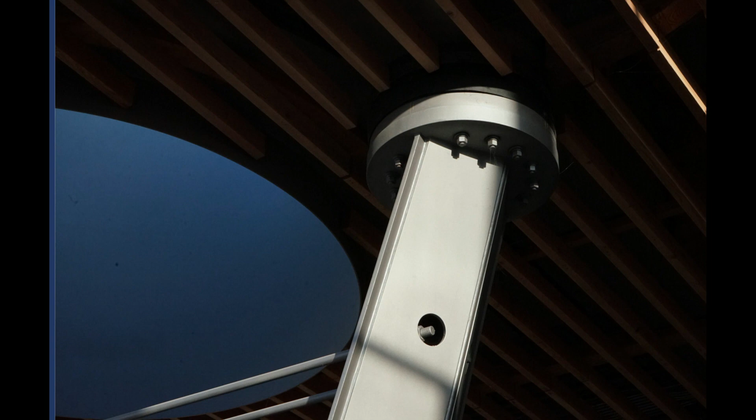Finally, there's these elements under the roof, concession spaces, bookstores, coffee shops. These are also timber, and these were designed in a way that allowed us to set up the contracts so that a lot of people could get engaged in them.

So yes, they're mass timber elements. The biggest ones are like 60 by 40, single story kind of little pavilions in an airport. But they're set up of a kit of parts that could be bid out separately to smaller shops.

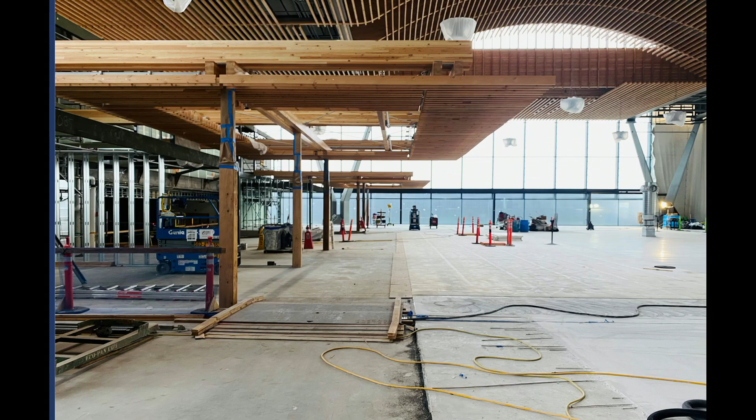So a roof lattice, beams, and other kind of glass elements that the different smaller shops were able to get the contracts for those. So here are those under construction recently.

Here's one of those shops, Superfab. Former model makers in an architecture firm started their own fabrication business. And this project allowed them to grow dramatically. So they went from making architectural models to making massive amounts of stuff for the airport, because it's the same tools.

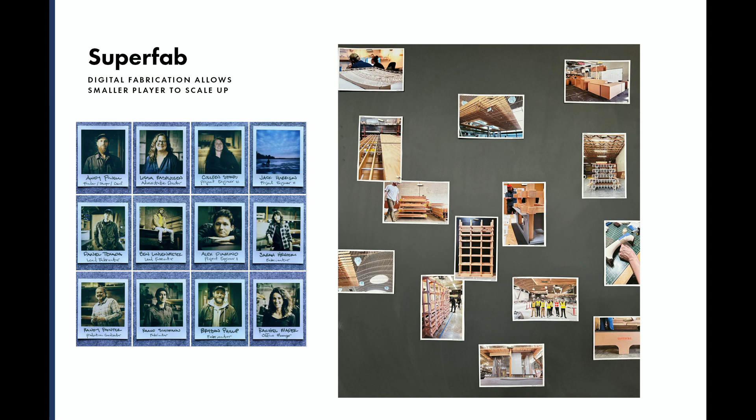Like the tools you have in the basement here, these CNC machines, that's what built this stuff. It's the same tools. They learned that in architecture school, right? And they were able to set up a shop and be awarded very significant contracts because of what they learned in a place like this, right?

And here's like one of those concession pods, and this is what they got engaged with. They made the lattice, which is the stuff that hangs, that creates the kind of ceiling plane of these concessions. This stuff, they came up with a way to prefabricate it, and they called it flat packing, like you do

in IKEA. You buy a wardrobe or whatever, and it comes all folded, all these miserable little connections and stuff. But they came up with their own version of that to flat pack this stuff, bring it in on dollies, and slide it into place. Here they are making these flat packs of these panels, prefabbing them in their shops.

And then they contracted in turn with a small Native American company that does beautiful steel work, also digitally, cutting the steel elements that connect the dots on those concessions. So here you see the steel elements, wonderfully made stuff that is part of these concession elements.

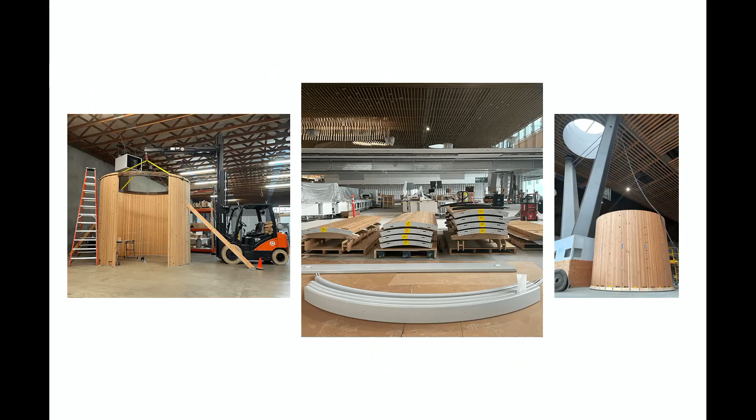And then here they also did these elements. These are like these barrels, which the TSA will use to interview people that do something wrong. So this is where you go if you've been bad in the security line. We're going to give you these beautiful little Douglas fir saunas, you know, that you go into and have questions asked of you. But they came up with a way to again, flat pack them.

You see they have these little QR codes taped to the ends of them, and they're all built in parts, and they're on these dollies, and they're brought in. But it's the thinking they learned in the architectural model shop that got them to this.

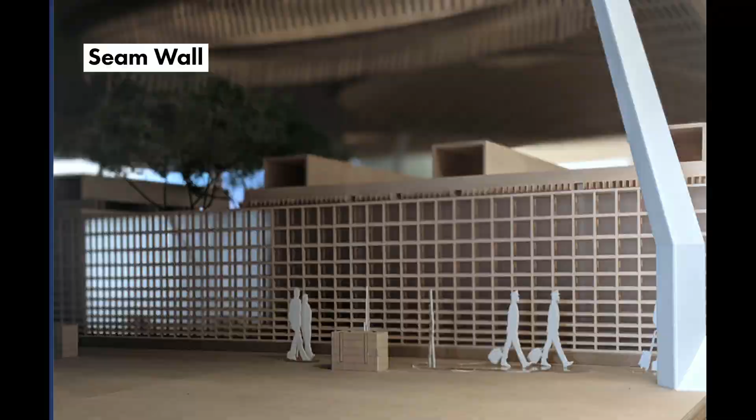And then finally, they made these, this is called a seam, which is a wall of lattice that helps create separation between the pilots, say, that are going through the security lanes and the public. It also helps separate retail spaces from people queuing in the security lanes, and it's huge. It's 500 feet long. And it was designed in collaboration with one of these shops.

Like, how do we design this so that you can make it? How do you design it so that a small shop like you can be awarded a contract to build this thing? And it was kind of set up, again, like a kit, but set up with a kit that starts on a CNC machine table like you have downstairs, and it's just pieced together.

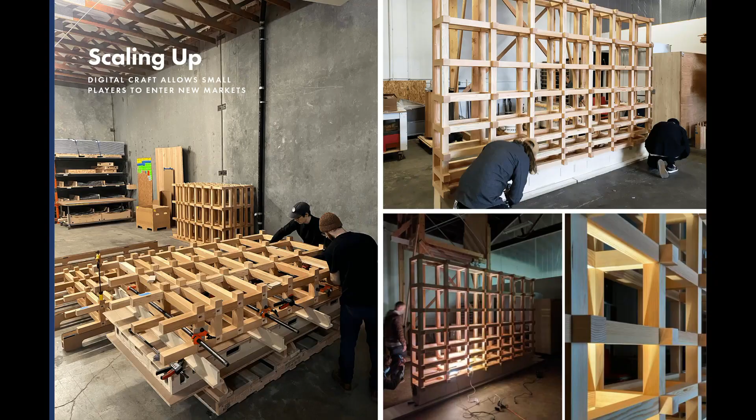And it all sticks together, and then here it is in their shop just a couple weeks ago, as they're working on it right now, getting milled into place, right? And then they're putting it together as chunks that'll be brought out to the airport.

And then finally, sorry, this is the final story. So this is a small family, Ben and Sarah, this is Ben, this is Sarah, in the mid-Willamette Valley that are woodlot owners. They own about 1,500 acres of primarily oak. That's oak. Oak in Oregon isn't harvested for lumber.

It's pretty tough wood to use because it grows like that, right? It's not straight. Typically, that's what happens. When they do a logging operation in Oregon, you get a slash pile. That's a slash pile. And typically, that slash pile is burned, right?

And so Ben and his mom had the idea, well, hey, is there a way we can start a business that actually responsibly harvests this oak and does something with it? And so they got into the flooring business.

Oak makes good flooring, but you have to get really small pieces. So Ben, who's a super creative guy and really into machines, got into the idea of parquet. He went to Germany and learned about parquet because there isn't a parquet plant in the United States. Well, there is now, but there hadn't been one for years, many decades.

He went to the local ag school, Oregon State, and bought out of their old wood shop their old plane to plane the wood flat. So the logs start here, and then the plane that he rehabilitated from the ag school is right there.

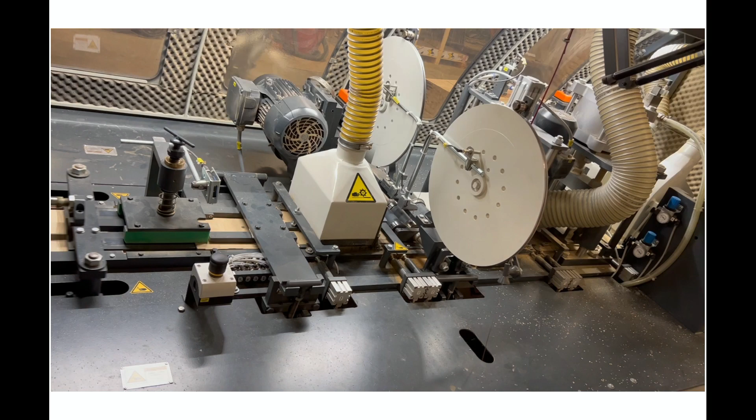Here's the machine, which is fascinating. It's basically a sewing machine. Parquet flooring, I didn't know this, is a series of little sticks all put in a line. The back gets routed out, and they sew it together with wire and then cut it after each piece is made. So that's the wire spool there, coming in, wrapping underneath each tile of parquet, and then it's clamped into place, and spit out at the end here as this beautiful little tile.

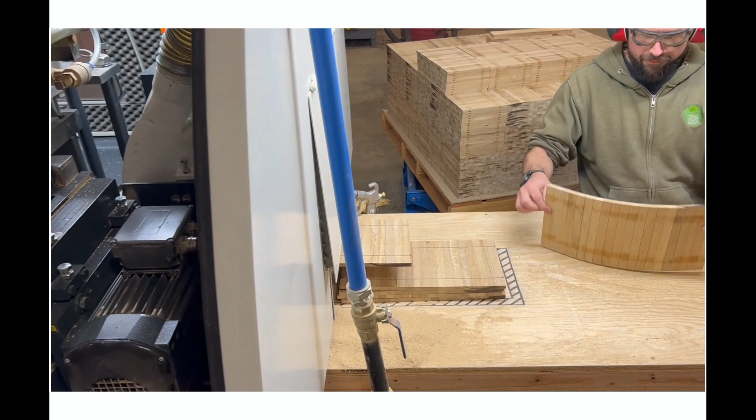This person's checking to make sure they're straight, because they all got to be square and straight, and then palletized, and in our case, sent to an airport. And that becomes our flooring.

So here's parquet flooring getting glued into place, which looks like this. It's gorgeous, but it's also very appropriate to an airport. It's flat, it's massively durable, and its wear layer is the full thickness, so you can sand this stuff till you're down to concrete and it's still useful. This thing has like a 50 to 60 year lifespan. So it's way better than carpet, and it's as good as terrazzo.

He's got a huge amount of it yet to do, a lot of work, but it's beautiful. And it's that small family we'll be able to point to. We know exactly what forest it came from, exactly how far they drove to deliver it. And every bit of the building, we'll be able to say this flooring came from Ben and Sarah down in Salem.

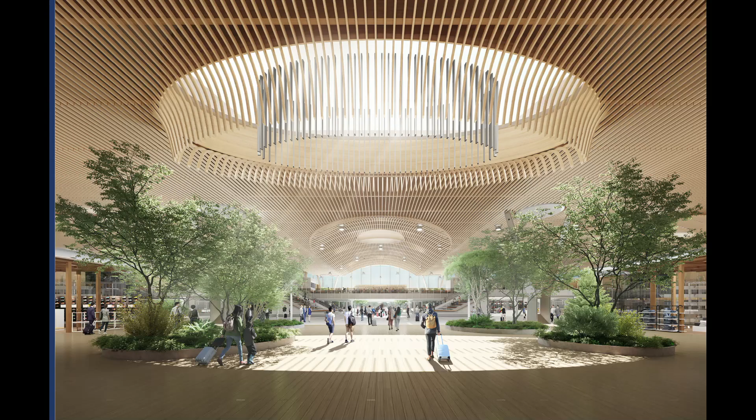And just some parting shots. So yeah, start with a model, you go to the rendering, that's the central part, and then you kind of wind up with just like last Friday, looking at it. We're almost there.

Sorry for running late, but 8 years condensed into about 70 minutes. Yeah.

Questions? Yeah, I want to ask about the type of glass you use. I assume there are slight adjustments for each side of the building, but how did you balance getting that very clear colored glass?

What about the difference between glare and transparency? I know you explained your structural systems, but what about the glass itself? The glass itself is really unique. It's jumbo glass, laminated glass within a space, and then another piece of glass, almost 2 inches wide total.

So the glass has a solar heat gain coefficient of 0.21, which is very good, because of the coatings on that glass. Its VLT is compromised because of that, so it's a VLT of about 39. Still pretty good.

We did a tremendous amount of exploration with different kinds of glass, and we had to bring the CEO of the airport to agree to spend millions of dollars on this glass order, because it is both performing and transparent, which is always a balance. You want to see the river, see the clouds and the geometry of the clouds—that's important to the passenger experience in this building, but it has to perform.